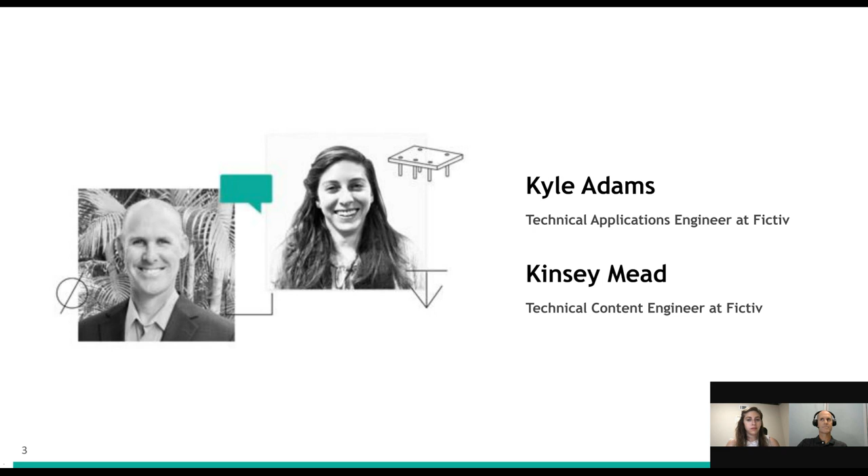Thanks so much for that introduction, Carlos. As Carlos mentioned, we'll be talking about all things injection molding, starting out with some of the benefits of plastic injection molding, and then talking about where injection molding fits into the product development process. We'll also touch on how to get high-quality parts and how to decrease your lead time, because we know everyone wants parts quickly and at the quality that you need, and then we'll finish up with some Q&A, so definitely make sure you're asking questions in that box.

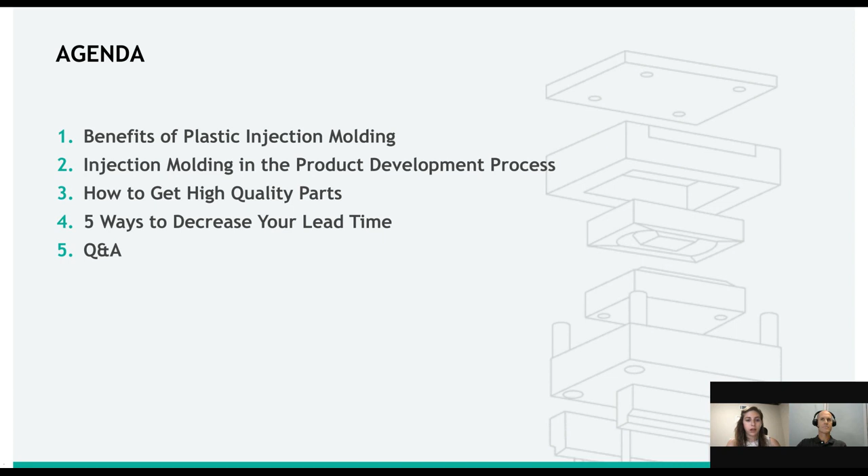Let's start with a little poll. In your design process, working with injection molded parts, when do you begin to engage with your tool maker? Do you start during the concept phase, right at the beginning, when you begin prototyping, later during validation stages, or do you start right before production begins? We'll also make sure to fill out that poll.

All right, so it's looking like a lot of people like to do injection molding later in the process, maybe during production. It makes sense for large quantities of parts, but we're going to talk a little bit about doing it earlier in the process. So let's get started.

First, as I said, we'll touch on some of the benefits of plastic injection molding. For one thing, it's a really cost-effective and quick turn process. Once you have your mold finished and ready to go, each part is made extremely quickly. Single cavity tools can produce as many as one part per 30 seconds on average, so you can get 500 to 1,000 parts per day, which is great when you're heavy into that production cycle. This allows the quick turnaround on part production orders to meet demand that you may have for your products.

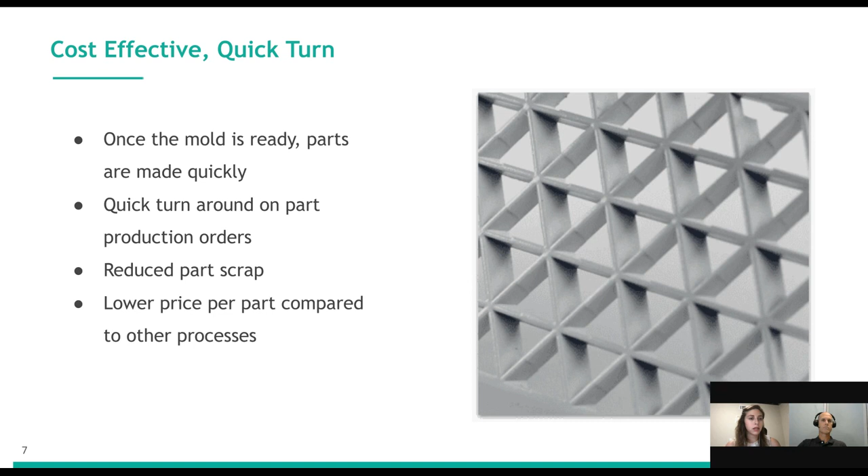Oh. Sorry, there's that slide.

And then with injection molding, you have a really wide variety of material choices. We're talking about plastic injection molding today, and there are so many different resins that you can use, and they have a wide range of properties. So depending on your application, you can choose for strength or chemical resistance or electrical resistance, or you can do a blend of materials that will give you exactly what you need.

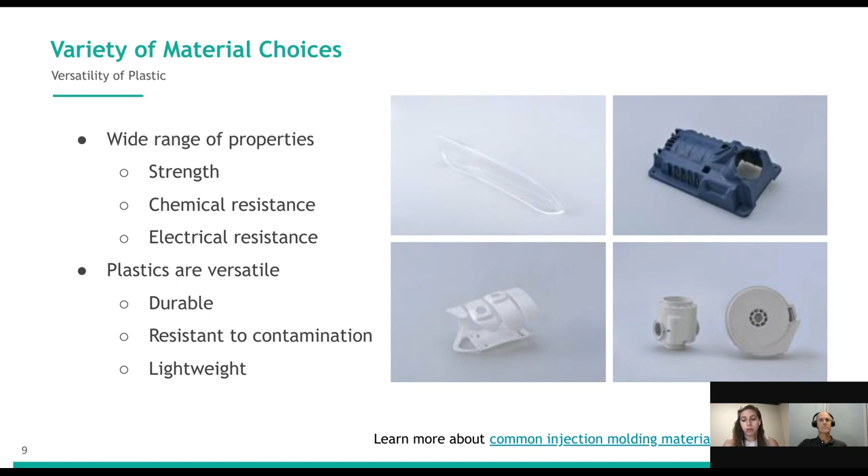Plastics themselves are very versatile. They're durable materials, resistant to contamination, and they're lightweight. So they have a wide range of applications. All right, so what we want to do is talk about injection molding in the product development process, and give a couple of breakdowns on some different tooling options that you have.

First, I want to start with just a real quick brief overview of the injection molding process. It all starts obviously with the tool design and build. Once that tool is complete, the tool gets loaded into the press. Plastic is then injected into the tool and cools. Once that plastic cools just enough to hold its shape, the tool opens, the part is ejected, and the process repeats itself.

There are a couple of other processes out there similar to injection molding, more so on the thermoset type material, which would be compression molding, transfer molding, or LSR. Again, these are all typically in the thermoset materials, more the softer rubber or silicone type molding.

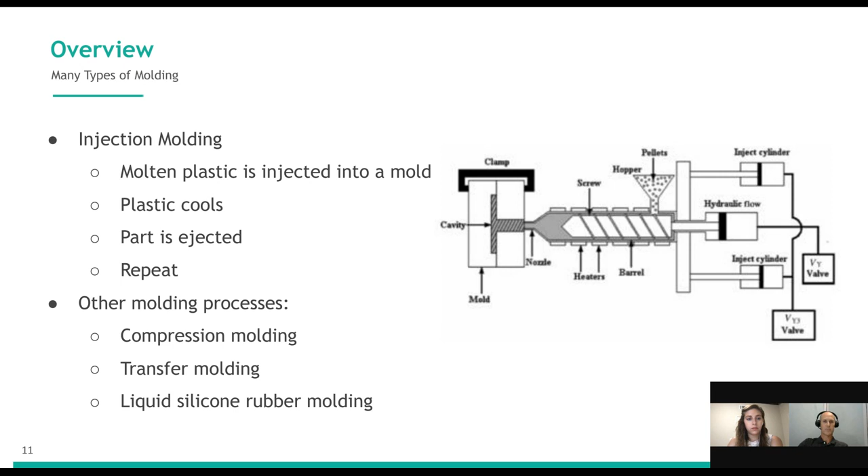What we've got here is just a couple of different options to make your decision for which direction you want to go: prototype, bridge tool, design validation, whatever you're needing at the time. You can go down the path of cutting an aluminum mold, which will allow you to run a small amount of parts within certain limitations, but it's an option for a true prototype tool.

The other option would be to go with more of a steel mold, not traditional, but a steel mold that will allow you to achieve your prototype tool requirements, but also can help bridge that gap and allow you to run production parts at the same time. Overall, as you see from the chart, lead times are very similar. There's not a whole lot of difference between those when it all comes down to it.

The aluminum tool typically costs a little bit less, but there's a reason for that. One of the main reasons is that with the prototype tool, what you're getting is typically a core and a cavity insert that would fit into a larger frame. That frame is usually already installed on a press, so you're truly only getting two pieces of metal. Again, the reason that this costs a little bit less is because you're getting less.

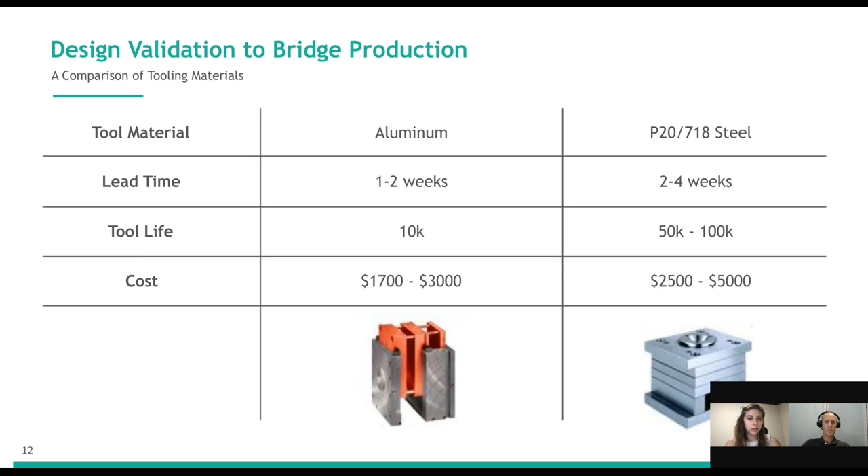Production tool. This really is the luxury car. This has got all the bells and whistles. It allows you to run 24/7 operation, producing, unlike the reference that Kinsey mentioned earlier of 500 to 1,000 parts a day, depending on the cavitation you select, tens of thousands of parts a day. Again, it depends on just how far you want to go with it.

Tool life, obviously, well above that 100,000. Sometimes with these tools, you can get into the millions and millions of parts. It just depends on your requirements.

Obviously, all that comes with a much higher cost, 25,000 or well in excess of that. There's oftentimes where people are spending millions of dollars on molds just for one. All that comes with a much longer lead time, though, as you can see.

So Kyle, what are some reasons that someone might start with a design validation tool like you just talked about and then proceed with one of these high volume tools? So obviously there's a tremendous cost that comes with this high volume tool. A lot of times investing in that cost without truly validating, making sure the design is what you're needing and wanting, is critical.

A lot of times what customers and people want to do is they'll want to use that design validation tool to work out any kinks, work out any bugs. You can spend a lot less money, still get a molded part, have some takeaways, your learning lessons on the part, make some engineering changes so that you can actually shorten that lead time that's noted there on that high volume tool.

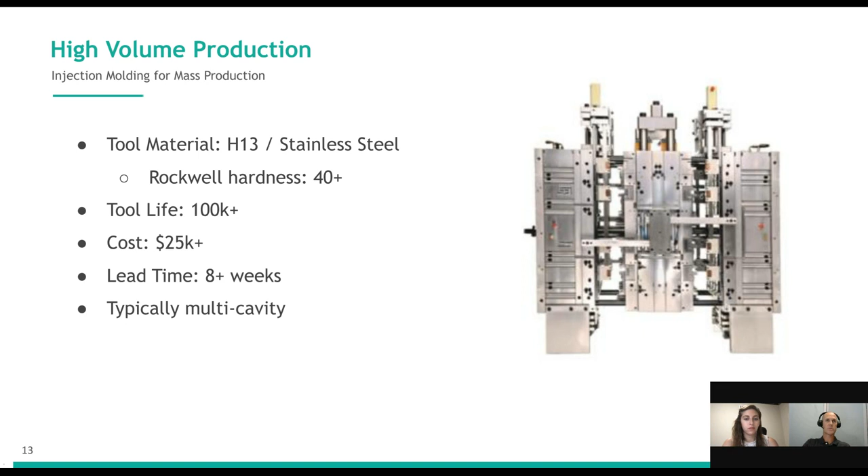Manufacturing location, obviously there's lots of options, lots of countries that are manufacturing tools. What we want to do is kind of go with the two big players, between a U.S. aluminum tool and a steel tool that's made overseas in Asia. Again, there is some significant difference there, but we put together a quick little hit list there for you to take a look at. What would you say is the main difference in your experience between a U.S. tool and a tool from Asia?

Cost, when it all comes down to it, is very similar. There's usually not a significant difference. The biggest difference that I've found is just in the shipping time. Obviously, if you're located in the States and you buy a tool from a U.S. partner, a U.S. supplier, there's a lot less shipping time and shipping costs associated with that, as it's noted there. When you're sourcing something overseas, you have to factor that into it. But again, that comes with advantages and disadvantages at the same time.

I see one of the pros here is proximity of secondary shops. Why does that matter? So obviously there's a large pool of manufacturing being done in regional centers within Asia. A lot of times what happens is you have these different secondary shops, whether it's texture shops, heat treating, material distribution, all very centrally located. You don't tend to find that here in the U.S. as much.

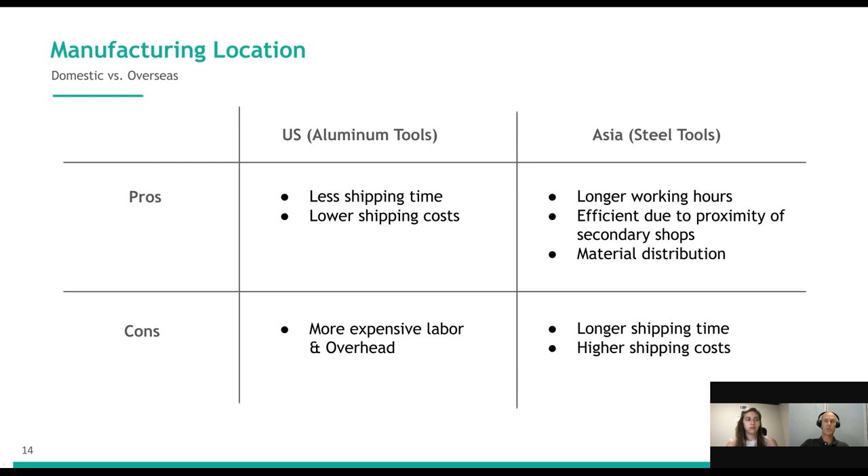So a lot of times you're having to ship that mold, not just across town, but really sometimes across the country to achieve that texture or achieve that heat treat. So you have some shipping back and forth, which of course adds up with both time and money. Awesome, makes sense.

Again, another little chart that kind of throws all the different options out there, allows you to see a quick breakdown, a comprehensive guide from all of our previous slides. One thing we haven't talked about too much yet is the finishing options. Why is this more limited for an aluminum tool? You're not able to polish aluminum like you can a steel tool. So a lot of times if you follow, which we do, the SPI standards, you're typically only able to achieve an SPI A3 polish on aluminum tools. So if you're needing something that's a high polish, you just can't quite get that with aluminum.

Same thing with texture. If you need a textured part, after running 10,000 parts, that texture starts to wear down. So your first part off that tool and your 5,000th part off that tool will actually look different just because of that wear. So again, you kind of have to stay within those finishing options.

The lead time also, we see a big jump from the rapid design steel mold, 2 to 4 weeks, to the 8+ weeks for production tooling. Where does that big increase come from? A big part of that actually is in the design of the tool itself. A lot of times what you find is because the high volume production tool truly is custom, you've got sometimes 2 weeks just in the pure design stage. So in contrast, you go 2 weeks for the design, you go over to that rapid design steel, you can almost have a tool complete in that same time frame as just designing that production tool.

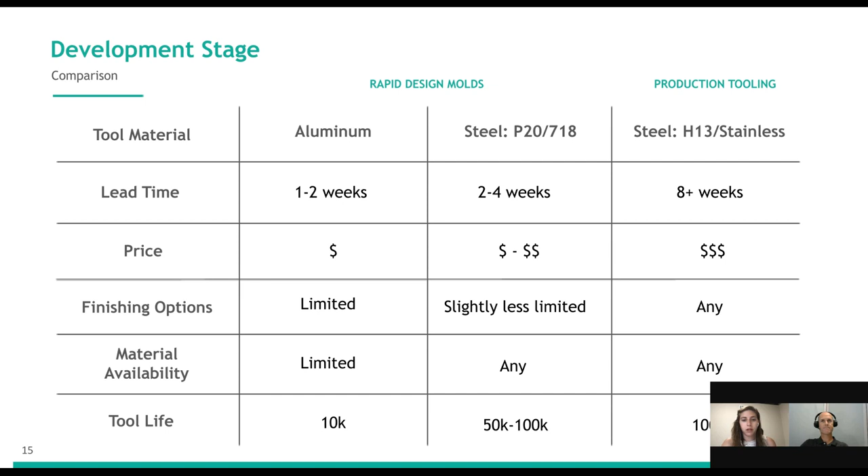Great. Yeah, there's a lot of information in this table, so you can see the slides after this too to refer back. Yep. So, I want to give you an example of how some customers use our services, use the different design stages or design validation options with the tools. For instance, we've got a medical customer. They wanted to do a design validation. So they actually invested in a P20 steel. We sampled the parts, ran a small run of parts. They performed their assembly. They did their testing.

They found some little design tweaks that they wanted to add, not only for part function, but also for assembly. So they've come back and given us this whole list of changes they want to make. One of them is ultrasonic welding. It was a concept that wasn't even on the table when we first had discussions with them. So it was not reinventing, but having to make some decent engineering changes. Instead of making all new tools, we approached this as a step-by-step or staged approach.

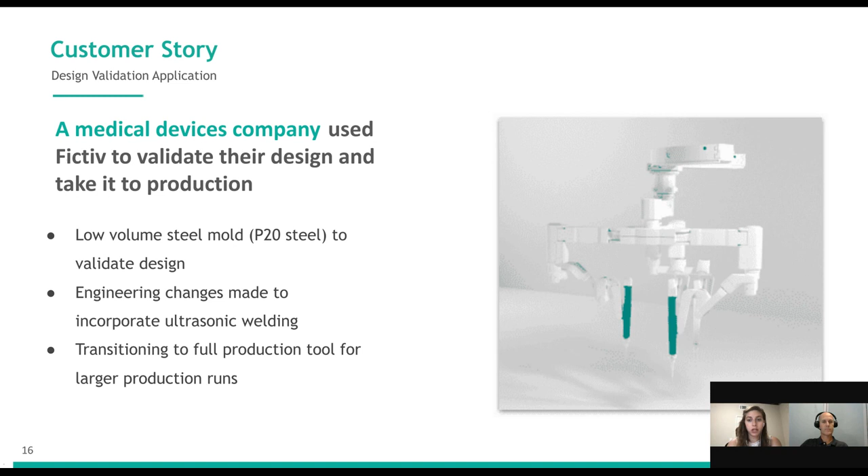So we implemented one change first to see how the customer liked it. We implemented another one and another one until we finally got to the point where they're happy with the assembly, which will then allow them to use that tool for production, for beta units, for initial runs. And then their plan is to actually exhaust that tool, and once they get to that point, invest in the full production tool. Awesome. Yeah, great example of how to use injection molding throughout the entire development cycle.

Now let's talk a little bit more about how to make sure you're getting quality injection molded parts, because quality overall is going to contribute a lot to your timeline as well. You want to make sure you're getting the parts that you need the first time around. So one way is to work with really experienced mold makers. One thing to think about is how many molds your mold maker produces annually. This will tell you whether they have all of the necessary tools and processes in place, and you'll also get a sense of the resins they might have experience with. You want to make sure that they have the capabilities that you need.

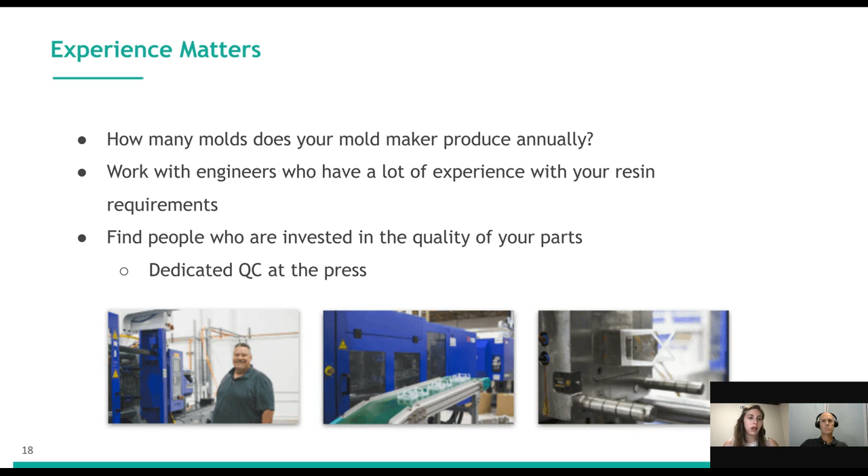Another key thing to think about is whether they have people who are invested in the quality of your parts. So you want dedicated QC at the press, making sure that the parts coming out are going to fulfill your needs. For example, Fictiv has SQEs at all of the injection molders, making sure that those process parameters are dialed in and you're getting the quality that you need. Speaking of process parameters, that's another big effect on the quality of your parts.

The basic initial process parameters that you put in are going to get your quality to about 80%, maybe just fine for prototype parts, especially if speed is key and you just need some parts in hand to start testing and validating. But spending a little extra time to take that quality to 95% by dialing in those process parameters more will get you to where you need to be for bridge parts. Maybe you're just about ready to go into production, but you're making some final changes, testing out the production process.

And then that little extra time, which overall is a lot of time and contributes to that 8+ weeks lead time for production parts, will really help you perfect your process parameters. And again, that's where you want someone there at the press who's dedicated to making sure that those parts are coming out as you need and spending that time to dial in those process parameters.

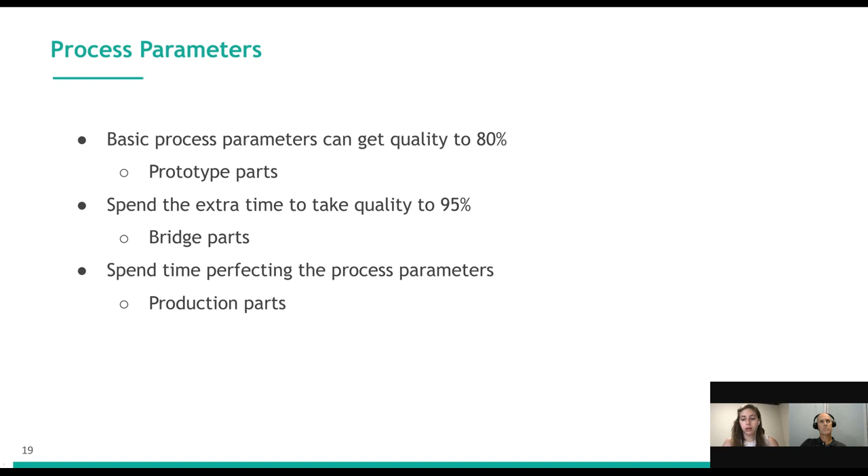So if we look at how it might look if you wait to incorporate injection molding until mass production or just before, you might do your initial prototypes with 3D printing, do a few design cycles with that where you update your design, make some more prototypes, update your design again, and then you get final prototypes. You feel like your design is ready. So then you engage your tool maker and start cutting the tool.

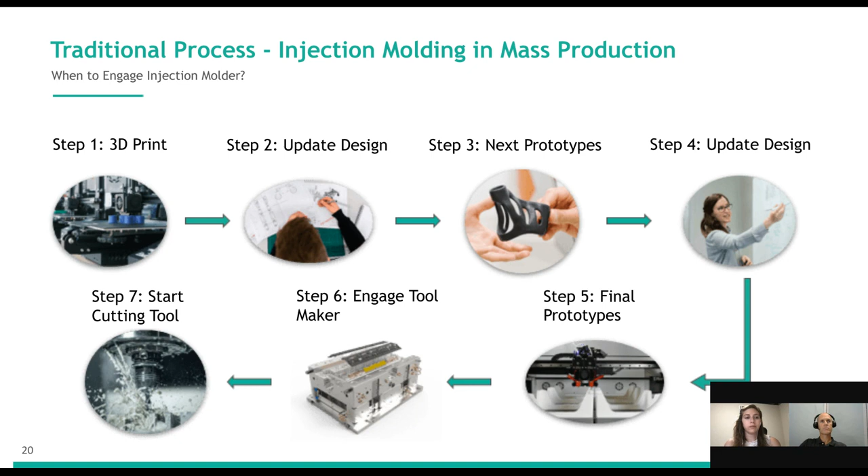But at this point, you might find, oh, this part isn't perfectly suited to injection molding. We need to change some thicknesses and some draft angles, but you've already been through all of these design cycles. So you're kind of redoing some changes that maybe you made.

However, if you're thinking about injection molding a little bit earlier, you can cut out some of these additional unnecessary prototyping runs. So you start 3D printing your initial design to make sure it's going to look and work okay, and then you start engaging the tool maker, maybe get some DFM feedback and update your design, then make some final prototypes and start cutting the tools.

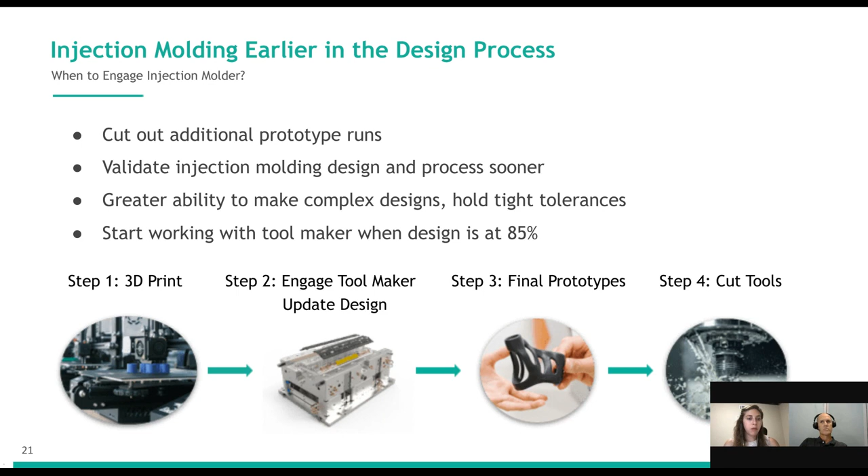And hopefully by incorporating this earlier in the process, you can validate the injection molding design and process sooner, and you have a greater ability to make more complex designs and hold tight tolerances, and maybe even with a more appropriate material earlier in the process. So one way to think about it is start working with the toolmaker when your design is at 85%. Don't wait until you're all the way there, because you'll save a lot of time and money when you don't have to redo those design changes.

So next on the agenda, we want to explain how you can actually decrease your lead time 5 ways. So using common mold base, I mentioned it earlier, a lot of times with the prototype aluminum tools, you're using a core cavity insert. Those are very typically standard sizes, 5" by 8" inserts, 6" by 9", 10" by 10". They're usually standard sizes. Same thing applies for even steel. So there's kind of off-the-shelf tools that will prevent you from having that 2-week design stage that I mentioned on the high volume production tool.

So, using those standard mold bases allows the speed of cutting to be increased. You've got steel that's sitting on a shelf that you can start cutting on immediately, and if the tool maker is accustomed to it, they've already got standard cutters in their CNC machines to help speed up that manufacturing process with those bases.

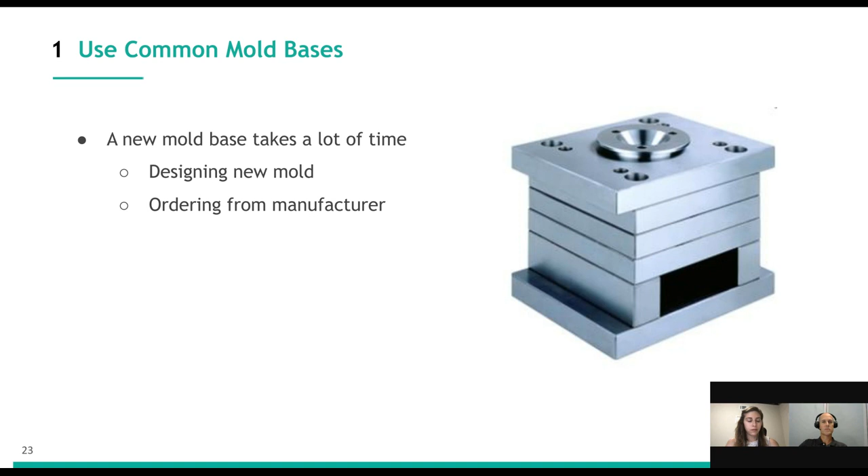So I mentioned getting DFM feedback on your injection molding design, and the earlier in the process that you can get this DFM feedback, the better. For example, we have a slide of a thickness analysis here for a part that may be made by Fictiv, and so you can see right away where there are areas that might be a little too thick, and you might see sink marks. And some other changes that you can make to just make your part more moldable and ensure that you have higher quality parts in the end.

And so this higher quality also contributes to the speed of your process overall, because getting the parts that you need at the quality that you need the first time around will save a lot of time in design cycles and reordering and making other changes. So again, contributes to speed and quality. And for this preliminary DFM, you'll want to look at the draft angles, thickness, as we see here, and then weld lines. But there are a lot of other factors that you can look at as well.

And this contributes to the continuity and efficiency of your design process too, because when you're getting this DFM feedback at this stage, it's more likely that the same people are still going to be working on this. So the same engineer that's ordering this will be able to incorporate that feedback and make any design changes before passing it off to the next team or the next step in the process. So again, getting that preliminary DFM is really helpful. Getting it with the quote, though, is not that common.

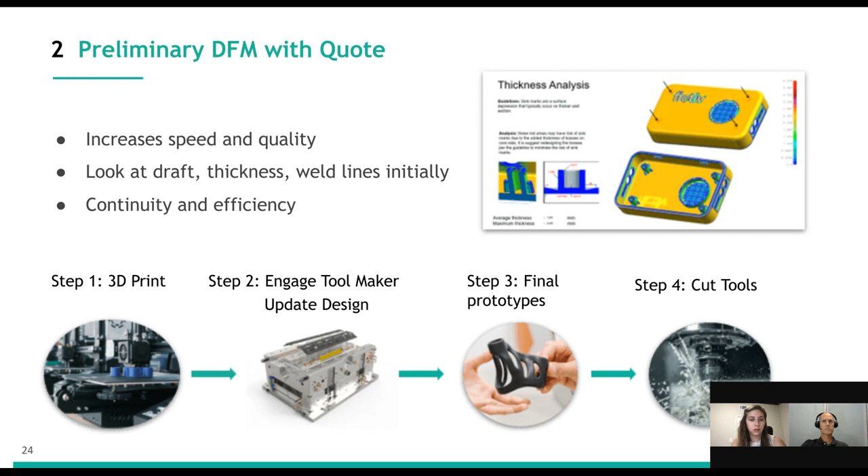Streamlined communication. As everyone knows, communication is key to success with any project. That communication starts at the very beginning during the quote stage, all the way through providing a tracking number. Without good communication, any project, even with the best intentions early on, has a high likelihood of failure. So having a partner such as Fictiv that provides streamlined communication is critical.

Time zone is a big one. Having someone that is maybe one or two time zones away is helpful. A lot of people go and find a shop they want to work with that's in China, for instance. Knowing you're working with a shop that many hours ahead or behind can make things pretty difficult, preventing you from having a nice time at night because you're having to get on a call with the overseas partner at midnight or early morning. So having someone local to communicate with truly is an important and key aspect of communication strength.

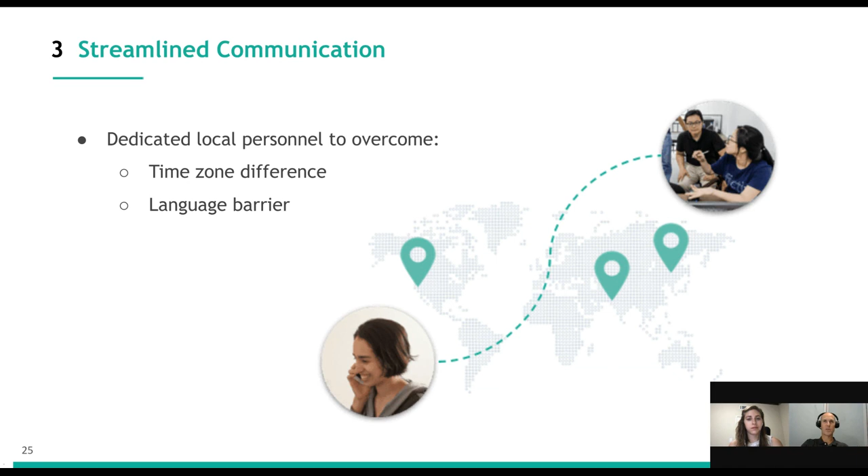Number 4: working with highly vetted suppliers. This goes back to making sure you're working with experienced mold makers. When you start injection molding your parts, it can be difficult to actually find an injection molder. How do you find them? How do you start engaging with them? How do you know they'll produce the parts you need? It can take months to go through this process, and you still experience a lot of risk. How do you know the quality is guaranteed? When you work with highly vetted suppliers, you can meet your lead time and prices without so much risk, and they'll be capable of handling whatever parts you need.

They have that experience from making many molds per year, and they have those processes already in place. This contributes to speed, because the biggest thing that hurts your lead time and overall process timeline is getting parts that are out of spec. When you get parts that don't work, you need to make design changes, reorder, and maybe wait for tool modifications or a whole new tool, then cut the tool and remake those parts.

Fictiv is very helpful here because we have a network of manufacturing partners we've already vetted, ensuring their parts are high quality and meet the lead times you'll need. We also have a continuous rating system, so every time they complete a project, they're checked again. So we only have the best molders and suppliers working on your injection molded parts. This is super helpful because you want high quality parts on time right off the bat, and paying for quality is worth it, because in the end, time is money and you don't want to lose that time in your process.

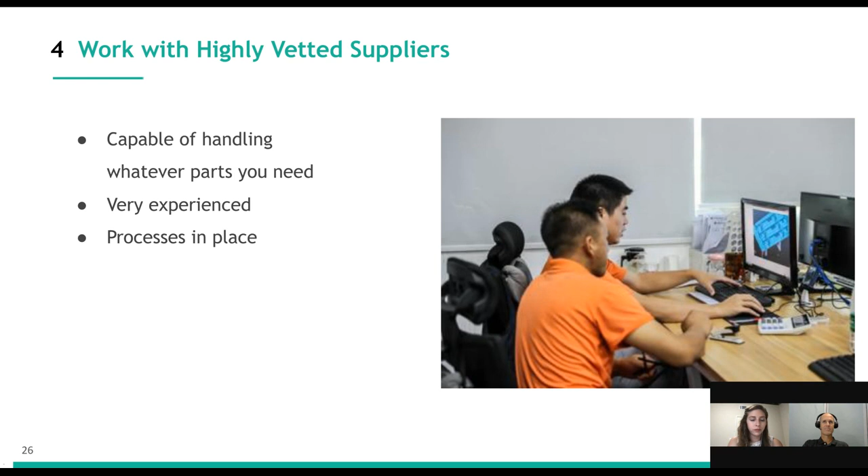The fifth way to help save money and time: using a digital manufacturing platform, again such as Fictiv. This actually goes back to the previous topic of communication. Having the ability to upload a part to a platform and provide all your program or part-related information is the biggest step to giving clear communication to anyone touching that project on the back end. Having that easy, streamlined process allows for saving time.

At the same time, it also allows for a continuous partner that you're working with. You could work with someone on the 3D printing side of things, then move into the injection mold side we've been talking about, or anything else you may need on a project, even CNC-related or cast urethane work. So having that manufacturing platform is critical. The one thing you want to keep an eye on is back-end security for your intellectual property, making sure there's protection at the partner you're working with, so that what you've spent so much time designing isn't getting lost somewhere you don't want it to go.

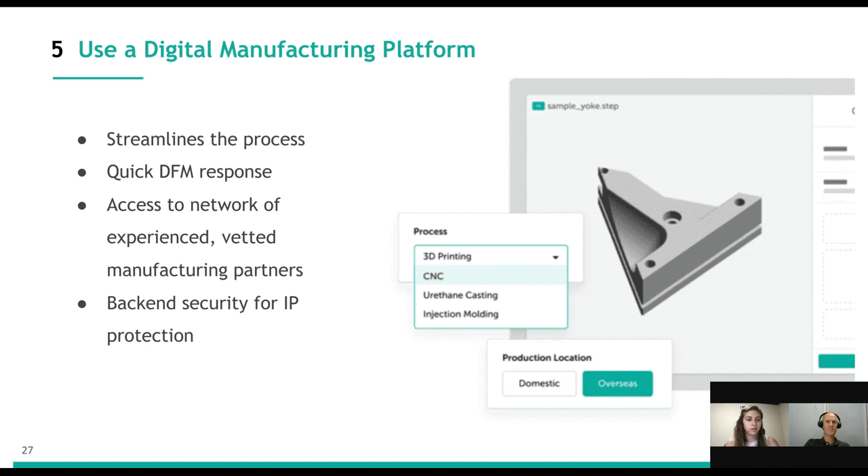So we've touched a little bit on Fictiv and some of what we offer, but our capabilities for injection molding cover both rapid design validation and production molding. Those rapid design molds use aluminum molds, which, as we talked about, have higher material availability and finishing capabilities. Sometimes they're slower, but because of the processes we have in place and our manufacturing network, you can get T1 samples in as fast as 10 business days.

With that, you can get a low quantity of parts if you just need to validate a few, but you can also go up to 10K units, and the tool life for those molds is actually up to 100K. So very versatile molds there.

And then when you move into production, we have you covered there as well, with T1 samples in as fast as 15 business days. So still very quick, even for these harder steel tools that are great for up to 1 million shots. That's a lot of parts you can make.

And again, we have the benefit of our digital platform, which Kyle just described, really useful for uploading a part and getting a quote and DFM feedback right away. So if you want to experience that after this, you can sign up for a free account at fictiv.com and go upload your injection molded parts.

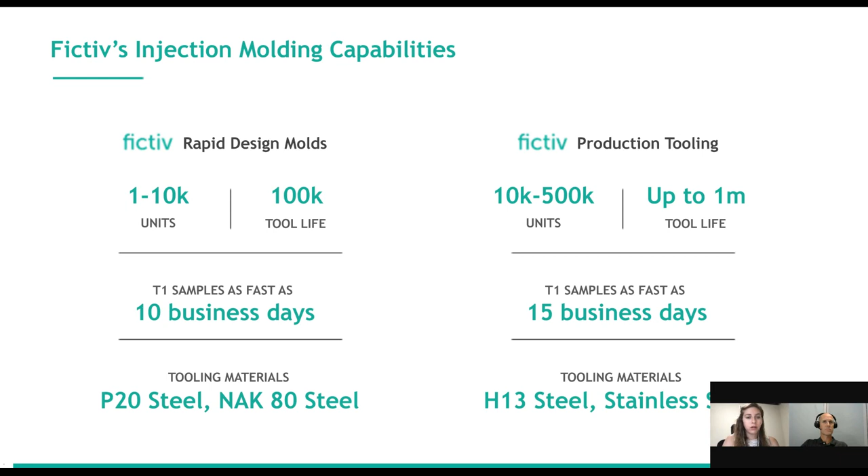Just to recap on the key takeaways for today: we talked about both steel and aluminum molds. They both have advantages and disadvantages as tool materials, and the manufacturing location can be a deciding factor depending on what you need for your project and application. These are some good things to consider.

Also, if you're not already, consider starting injection molding earlier in the process, during the design validation phase. Even steel tooling can work really well for this and lead you into bridge production and then full production. You also want to make sure you're using a well-vetted manufacturer who will spend the time to get you the high-quality parts that you need.

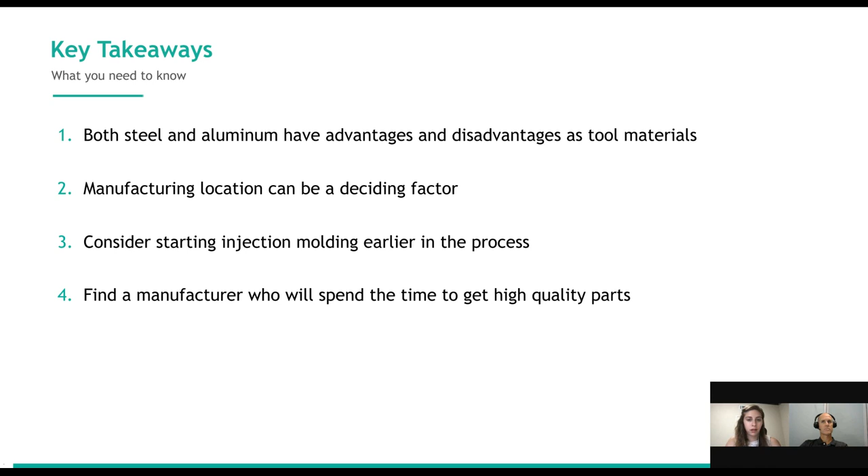Our first question is, what types of 3D printing technologies are used for prototyping in the manufacturing industries? Well, there's lots of options. There's obviously traditional 3D printing, and some people are really trying to experiment with 3D printing molds, but in my opinion it's about the same cost sometimes as you'd see for a prototype aluminum mold. So there are people trying to experiment with 3D printed molds, but there's really no way of getting a true 3D print with the injection mold process. They're two kind of still different processes.

Our next question asks, what does injection molding offer compared to using 3D printing methods and additive manufacturing methodologies in general? Could you comment on the pros and cons, and why we should keep using injection molding in production?